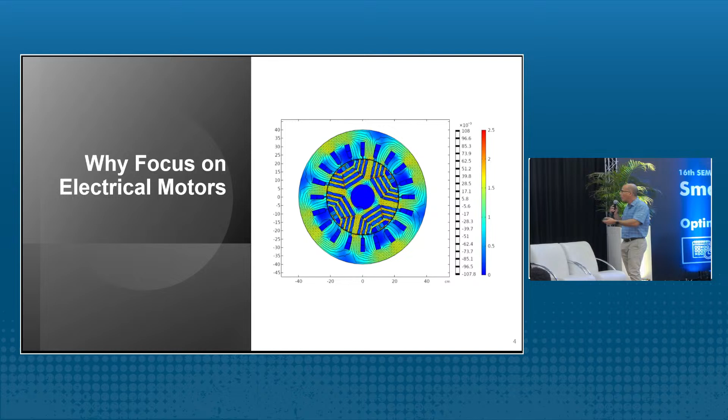Well, but let's establish a baseline. I don't know if most of you are electrical engineers or not, but this is a bit of my timeline. I started working with electrical motors, and really early in my career, I was approached to optimize their energy consumption, to make them consume less. And most of this was focused on replacing or improving the motors, but why?

These are some numbers. 53% of the energy consumption in the world right now is consumed by electrical motors, but this is old. This is actually growing. The applications I see coming up are more electrification, more motors that weren't there, and more FCs being used in places they weren't used before. Container ships, cruise ships, trains. More and more of these are being placed where they weren't before.

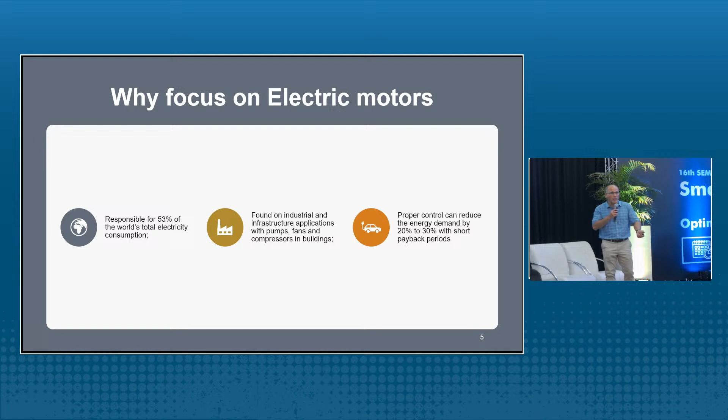I can talk about fans, compressors for buildings, name it. And if you do that properly, you can easily reduce the consumption 20, 30%. So this is really attractive. And that makes especially the sales say, oh, let's go for it. The investor, let's go for it. And you, hey, let's hold the horses a little bit. But let's go step by step.

Why this focus on electrical motors? If you go to the industry nowadays, and this is going to be a bit boring for some, but soon I'm going to bring you the problems, the fun part. Well, the induction motor, most of the industry still uses that one. In 2010, 2011, 2012, many customers were just using induction motors with nothing fancy. And for a simple reason.

An induction motor is a pretty simple machine. It's an amazing machine, a genius machine, where you have the stator. Once you energize the stator it generates a magnetic field, and the variation of the magnetic field on the rotor, the relative speed between them, ends up inducing currents on the rotor, which produce the torque, which spins up the motor. So by its nature, it starts to move, which is really great.

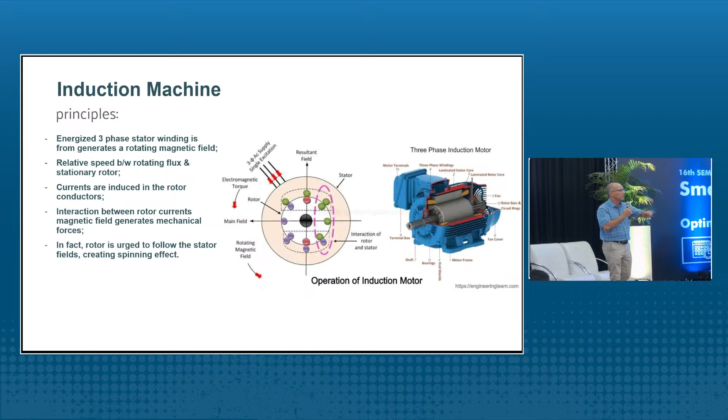And simple. That's why in many applications, fans, simple pumps, just connect to the grid, that's it. They have some problems, yes, but that was good enough for a long time. But then I started to be approached by customers saying, hey, now I'd like to have an FC there, or a drive, a frequency converter. I end up calling it FC all the time, sorry about that.

Why an FC? Because with an FC, we can first of all reduce the high current during power up. We can reduce repair costs. We can get power savings, because we can use methods to impose only the needed magnetic flux on the machine, reducing the amount of energy, especially in partial load. That is really great for that.

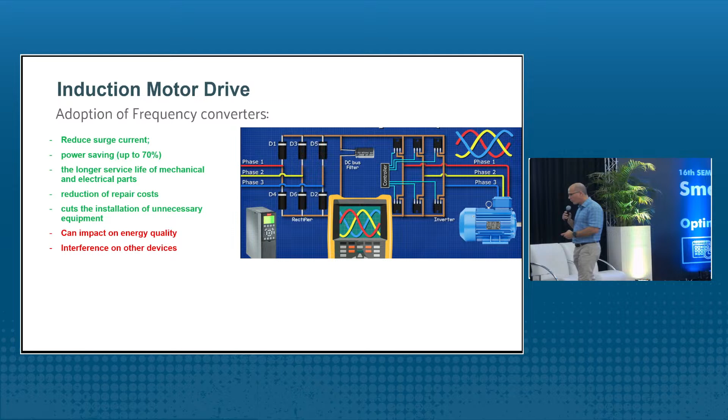And for a while, that was sufficient, till I started to receive a lot of these motors here. It started to come PM motors. And PM, basically the principle is quite the same, but there comes a big difference here, where in the induction motor you have just a circuit and a shaft that allow current to be induced and circulate to generate the movement.

The PM, you have the magnets. And just by thinking like this, you have the magnets there. You had already spent energy building these magnets, to impose this field, to align the monopoles to generate this magnetic field there. So while this rotor, these magnets, interact with the magnetic field, they start to spin. And by nature, we already consume less energy because the energy is already there inside.

And so for a while, I started working with some of the motors, especially low power. This is an example of, oh, sorry, too close. A small one, 7.5 kilowatts. And here you can really see the big benefit of a PM compared to an induction motor, and why people were so excited at that time. Let's use that one, including myself. Let's use it. Let's go for it.

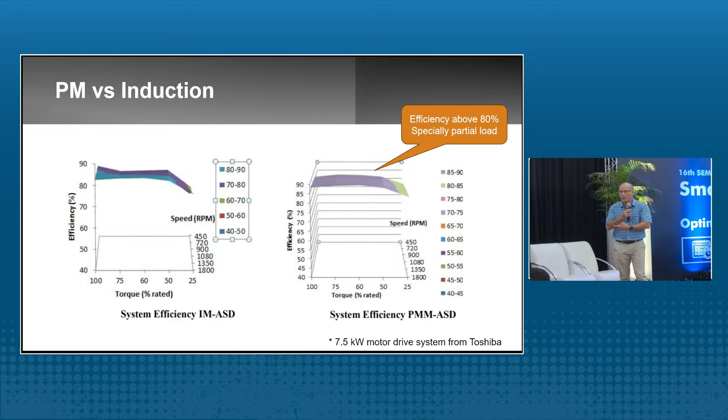So just by that, you see, oh, sounds not much, but then you have a line with 100,000 fans in parallel, then you see the big benefit. Oh, just let's replace it, right? I mean, pretty simple. But in the beginning, I started to question, okay, but can we use it, and now I ask these questions all the time, and I can point it out right away.

To choose a kind of motor, you really need to understand your application. But not only the application, if it's a fan or a compressor, but pay attention to the environment. What's the range of temperature I'm going to face? Are we going to have negative temperatures or not? Some of the applications are going to face minus 30 degrees, minus 20 degrees. Others go up to 60 degrees. This is important.

Lifetime of use. I'm talking about what's the torque profile? How long are we going to use nominal load, partial load? This is important. This needs to be part of the equation. And often, these are not at the beginning of these discussions when we start a product design, unfortunately. Now I bring it up, but it took a lot of headache. But it's just the beginning, and you're going to understand why I'm talking about that.

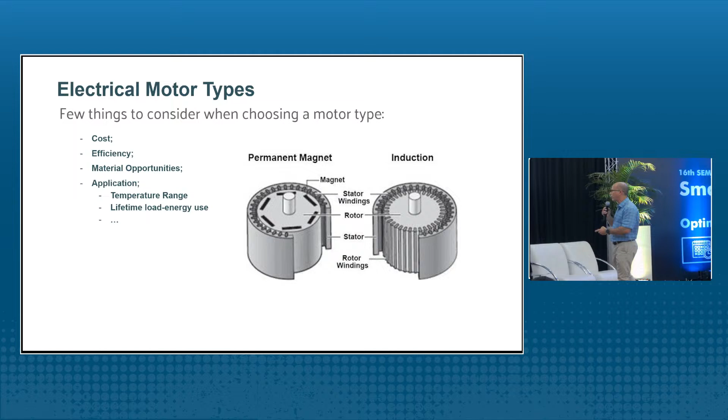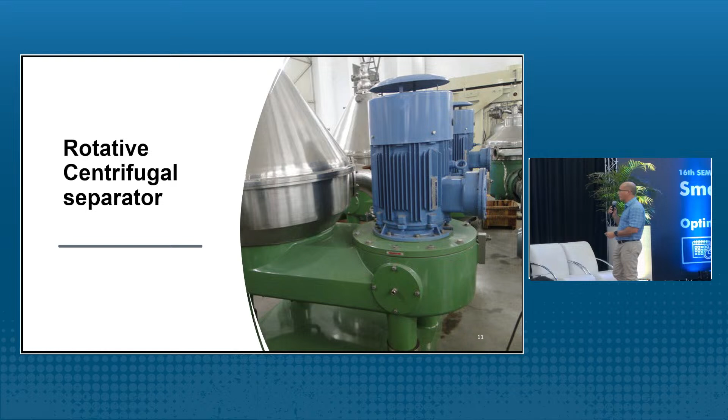This example was actually really fun to work with. This is a rotative centrifugal separator. I don't know if you heard about it, but the people that go to the gym know what I'm talking about when whey protein comes up. You have the separator, it basically spins up, and they do this process called the clarification process.

And for example, a fast story, really fun, interesting. The first week that I was in Denmark, in the supermarket, I went to buy milk. And then in the shelves, they had like 5 types of milk, and I couldn't understand why. They have soy milk, milk, several names that I had no idea what they were talking about. And then I approached the shelf, and one lady approached me, "You're not from here, right?" Oh, no, not at all.

Yes, this is 3.5% fat content. This is the different content levels of fat, 0.2%. It's done by these machines also. Smaller machines, but yes. They are used in many applications and different power sizes. Some to extract bacteria, some to extract oil from water, so it's a really large application area.

And when I got approached for this one, I was working on control for PM machines, and it was simply to work on overvoltage protection for this application. That's it, for a PM. And I was sold on PM. Let's keep it clear.

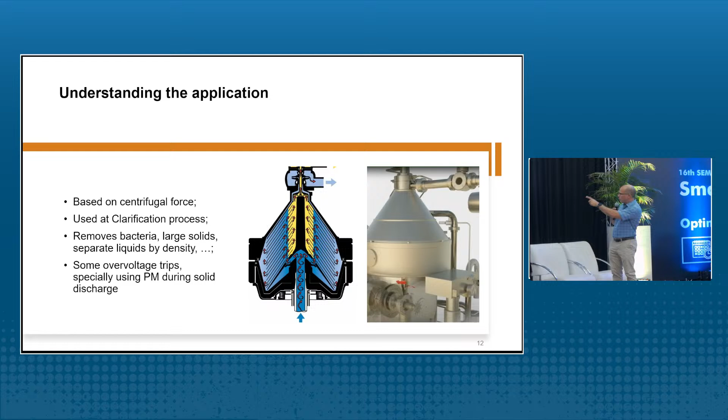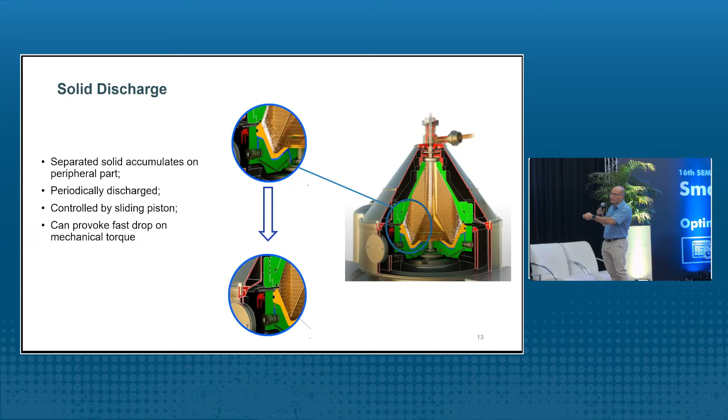And it was written in the documentation that I received that they were tripping due to overvoltage, during the solid discharge. What are you talking about? Investigating, solid discharge is basically during the centrifugal process: whatever material, liquid, powder, goes through this path. This is spinning, and then the heavier part accumulates here. Google it, there are several animations. There is actually one really cool one explaining pretty well how that works.

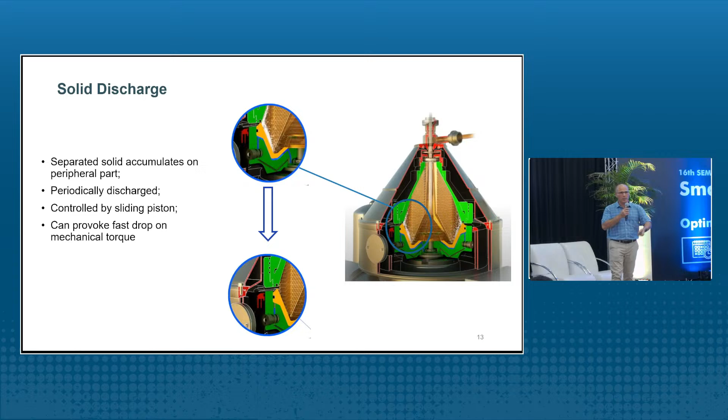But the problem when I was approached, the way it was described: when this valve was opening, I had over torque, and what I saw happening was a fast drop in mechanical torque, and then suddenly the machine was generating and tripping. Then I started really working on this project, which in the beginning would be a line from 55 kilowatts to 250 kilowatts. Then, of course, with overvoltage protection already mentioned, and ensure energy benefits. That's it. That was really clear.

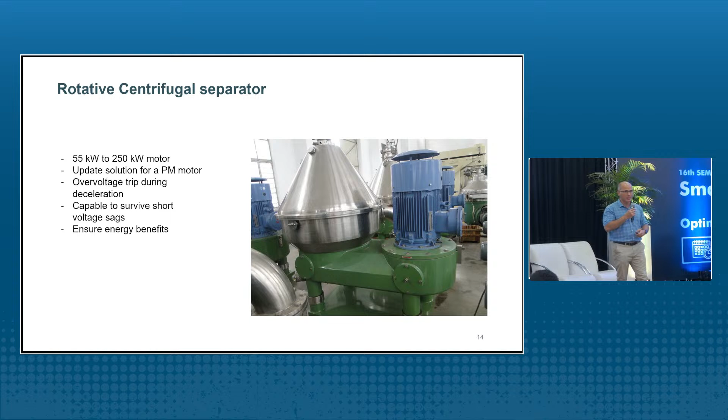Then, a couple of months later, I received the data of the motor, with a comparison with an induction motor, and it was amazing. This machine, which later on I learned was actually a PM-assisted synchronous reluctance motor, which is a big difference. I don't want to go into technicalities, but it's not a PM, it's a different one. If you go deeper, plenty of professors here can explain, but some of the techniques you apply to control a PM machine are a little bit different, especially initial position detection, right? We talk about it, and we suffer a lot with that.

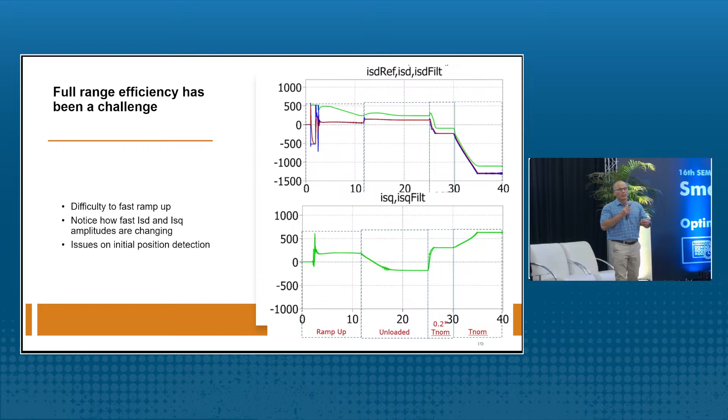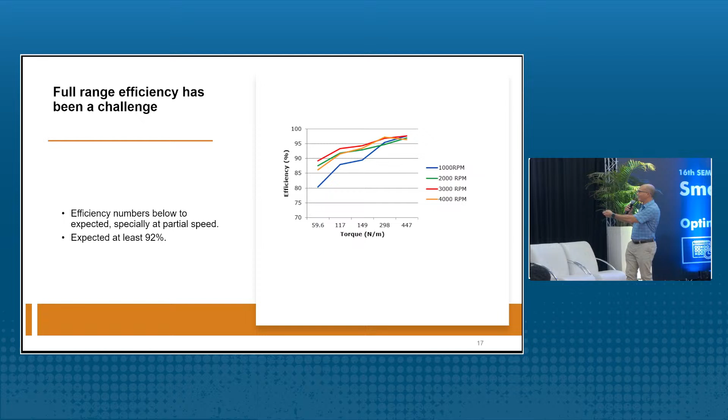When they build contracts like this to build a product, the idea is to have a full package, the separator, everything at that power size needs to be more than 90% efficient, the whole system. And my motor was already lower. So unless they would save more on the mechanical side, which would never happen, I needed to do something about it. Especially because they came and said, look, I measured, the motor is amazing, so you're doing something wrong. But I was using the parameters they gave me, and trust me, it was a lot of months, meetings, headaches, and frustrations.

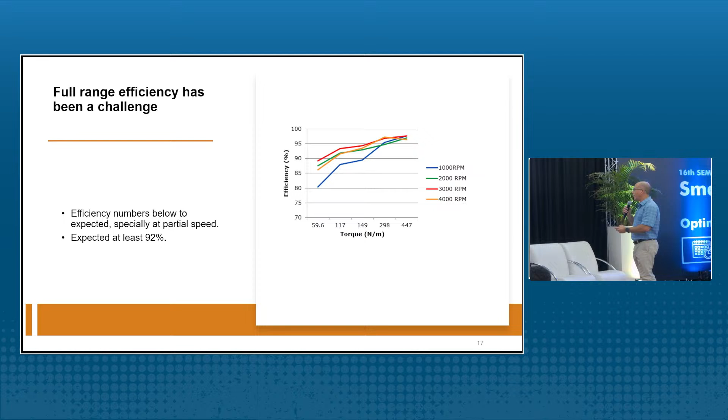Then, finally, I managed to find the problem. It was basically, hey, the parameters you gave me are wrong. Or, I didn't say wrong, but they have a small tolerance here; I needed to sound a little bit different. Sorry, guys. I didn't say the company, at least.

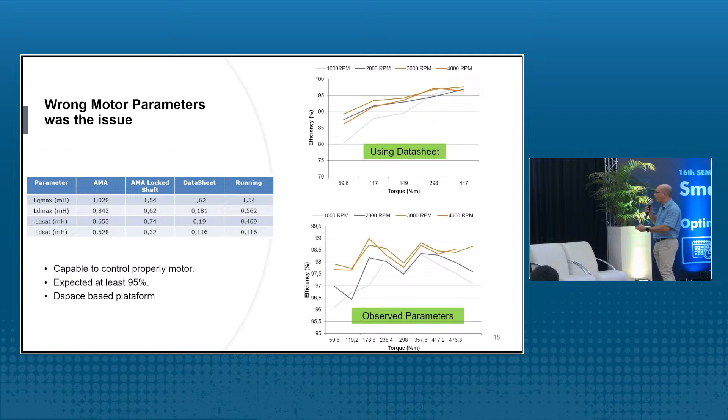Anyway, at that time we finally had a function able at least to determine these parameters. This is AMA, automatic motor adaptation, basically identification of motor parameters. It sends a sequence of signals into the motor in order to identify the rotor resistance, stator resistance, inductances, and so on. Once I finally got these parameters, that was the efficiency level I got. Even at partial load, I was above 95. That was great.

And then I think was the biggest mistake ever. Because at this point, I'm a specialist, out. Give somebody else the code. The rest is just implementation. Things are done, right? It's just implementation. And then you give it to somebody else.

And then I was already in another project. "I'm a specialist, Ben. You won't be spending your time coding, right?" Yeah. Then frustration: tests were terrible. They barely could ramp up when the torque was close to 75%. This was happening.

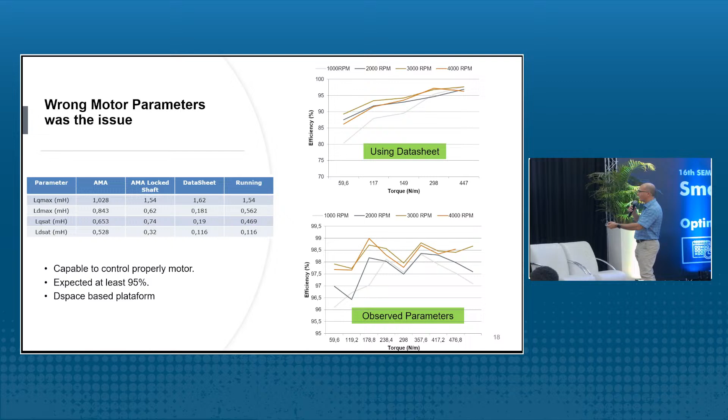Discussions, meetings, what's happening. I'm going through the code. Saturation that shouldn't be there. Reset shouldn't be there. Order, sequence. Basically, and that was naive on my part, I had the observer because the test setup that I was using before was a dSPACE-based one, right? Then the implementation, C code, using a CPU slower than my phone right now.

So you have no idea how frustrated I was because I used an observer to deal with the angle, position of the motor. This is really important. The professor is going to teach you about PM, the ones interested, but it wasn't suitable for the CPU on the product in the end. So I made shortcuts. In the end we managed, but after almost 1 month. And then you have a stakeholder that was already waiting 2 years for the result, right? Anyway,

finally, we managed. But from there, the product line would be from 50 kilowatts, 50 something, to 250. So the sales team was, yes. In the end, not really, because it took too long; for the lower power, you know what, let's use another type of motor. To make it worse, magnets at that time, neodymium wasn't that expensive, so they ended up going to neodymium because it was working anyway. Basically we almost shut down the product when it was at the end of the line.

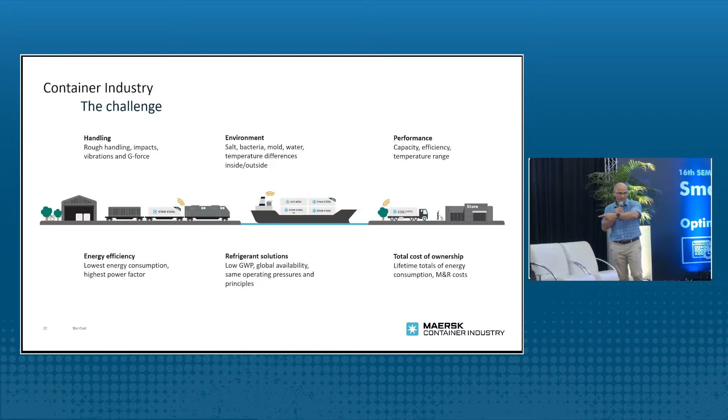And of course, they would like to save as much energy as possible. If any of you have seen a container ship close up, I'm talking about thousands of containers in parallel. So you save 100 watts in one of those, and energy comes from a diesel generator, right? So you got the equation. It's a lot of cash saved here.

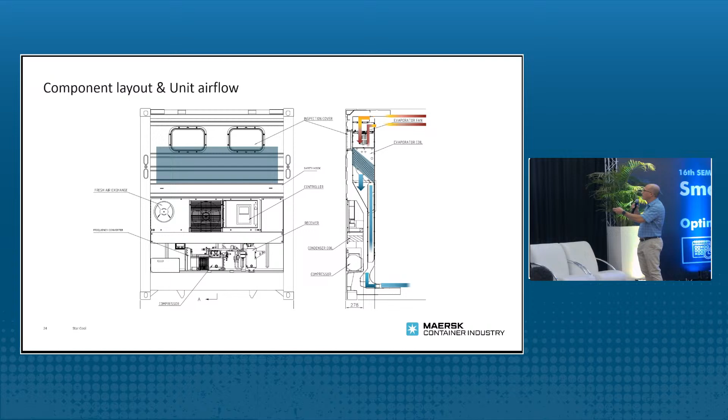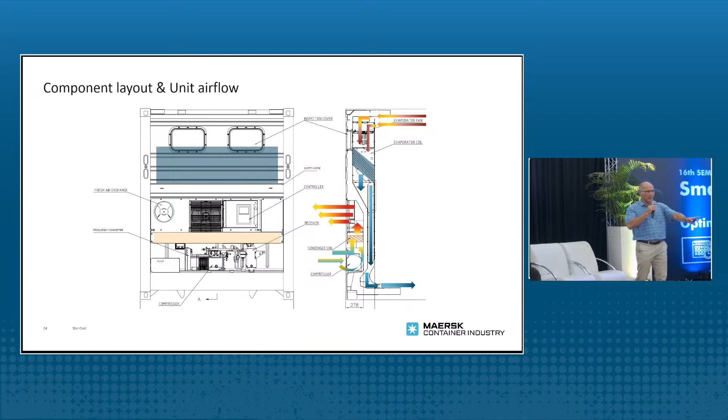But basically, the principle is quite simple, actually. You have one of the fans sucking the hot air. This air goes across the evaporators, which cool it down and drag it back. And then you have the condenser bringing out the hot air, and the hot air is sucked out from the unit through another fan, and the compressor drives the process to extract the heat so it can go out. There is plenty of material about that. I won't go into details, especially because I'm taking too much time here, sorry. I'll speed up, promise.

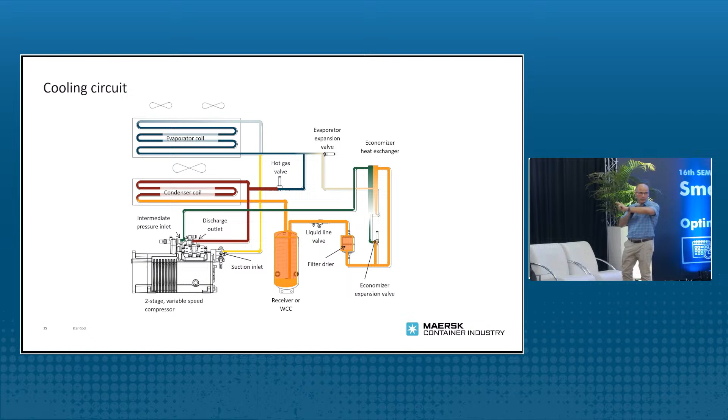This is just a circuit, but here the placement of the fans and the container is more visible. That is a good animation to explain, and there are good professors here to explain it. But what was my job? Here is the spec of the compressor. Basically it needs to run from 600 up to 3,300 RPM. And why 600? Because, if you see, oh, I need to go back here.

Here's the compressor. Basically part of the stator is the shield of the compressor. So you have a manufacturer building the motor, this part here, and then it's placed inside the cage of the compressor. And this compressor, and this is important, has 4 pistons, which regulate where the hydraulic fluids and gas go. And here also is the FC.

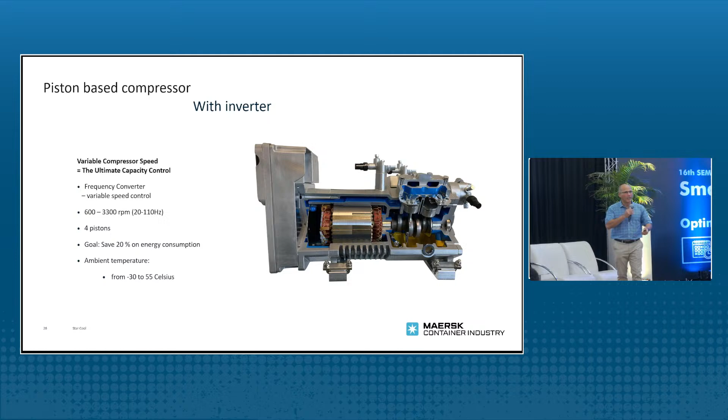And it can get worse. May I ask you, what should I do if one of these valves breaks and I'm in the middle of the sea?

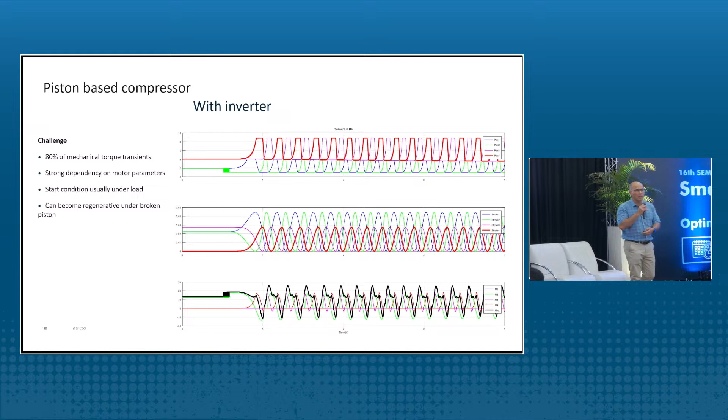Like this. Suddenly one piston breaks and then the torque becomes like this. What should I do? Should we set an alarm and stop the compressor? And stop the reefer? With, you know, full of tuna, which is pretty cheap, right? Or the last cargo that I heard about was 600 millions and it was just a container. Should we stop, right? No.

Keep going. Needs to run. Gonna consume more energy? Yes, but needs to run with this torque. And then I'm asked to put a PM. Yes.

But why all the excitement? Those were the numbers given to me by the motor manufacturer, where you have clearly the difference between an asynchronous motor and a PM motor. Again, as we talked about, how good these guys are, especially in partial load. So this brings a lot of benefits for the customer.

And it's important to point out that I have many, many cases where their operation was close to nominal, and the power size, and considering it was just, you know, 2-3% of saving for the power, I basically recommend, man, don't even put an FC, put just a contactor, that's it. You know, why? There are high efficiency motors nowadays. But in this case it was clear. Yeah, clear benefit.

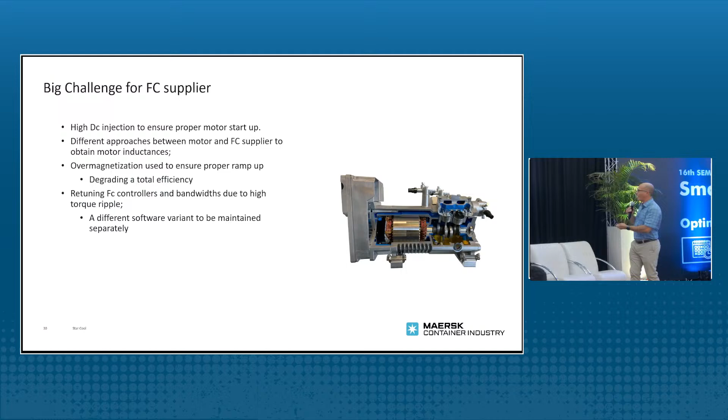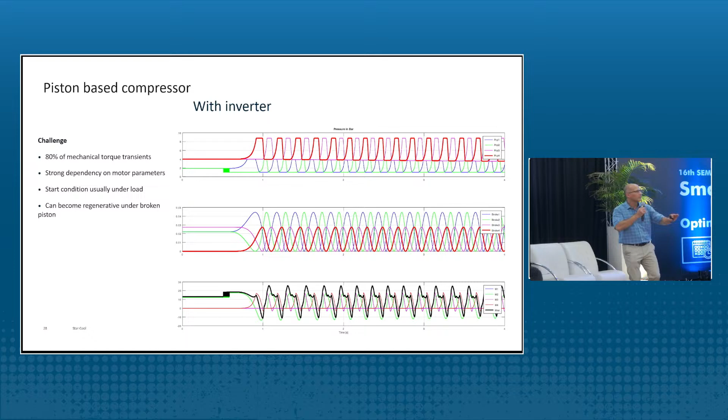But again, as I was saying before, a PM is a great machine, an excellent machine, but with some torque profiles like this, when you do the power consumption measurements on the motors, yeah, they are quite efficient, but by their nature they have some limitations compared to an induction motor. An induction motor, with something like this, if you don't control it properly, keeps running. During the transient they consume more, but then they settle down. These PMs, no, basically they lose it and bye-bye, you lost the machine.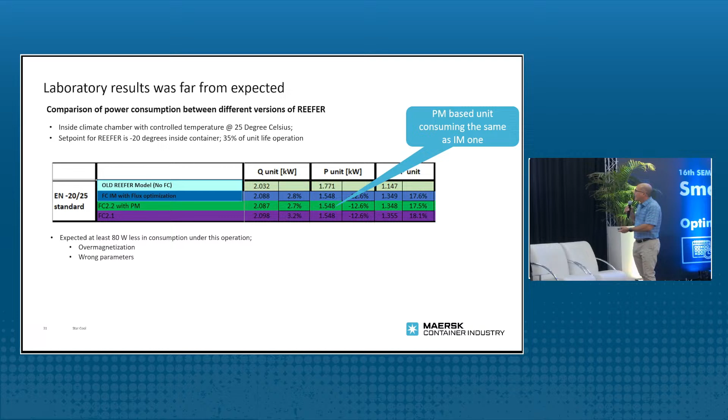That's it, you know. So in this case, what was done, and I know because later I left the team and did something else in my life, these guys said, man, I need to over-magnetize the machine. I needed to hold it, otherwise I would lose the sync. But over-magnetizing, I'm consuming more. That's a challenge. So the conclusion was, use an induction motor, man. It was more efficient. You just needed to tune a little bit more. That's it, you know?

Didn't we know that in the beginning? Actually, I had a feeling when I saw that torque. But, you know, again, the excitement. Ooh, take it easy, guys. That's why it's so important for you guys to listen, because most of you will be my boss. So please listen. When I say, man, please, what is the torque profile? Where is the temperature range? Which CPU are you going to be using? This is important. It is not trivial.

Unfortunately, my lost hair, my experience shows that. I face it with pain. Okay, and then during that time, I

joined the group, and it would be easy sailing in theory, because it would be, oh man, I have three more fans there. Let's put an FC there. Let's put a PM there, and it's just a fan. Oh, well, yes. And then we saw the measurements, the efficiency. That's gonna be easy, right? Easy, great. And then, of course, an uncomplicated profile. So retrofit is gonna be simpler. I mean, easy sailing. That was a misconception.

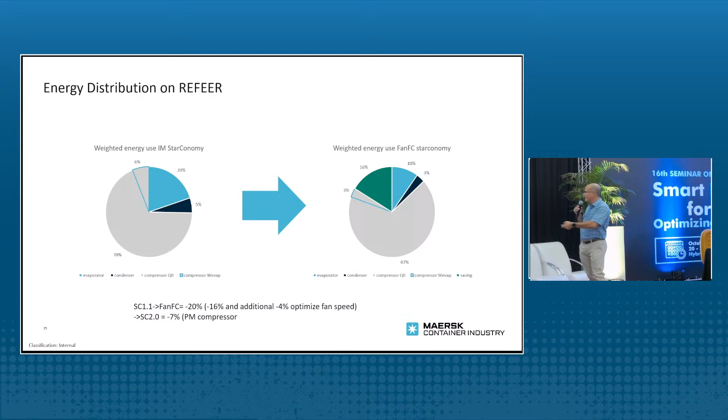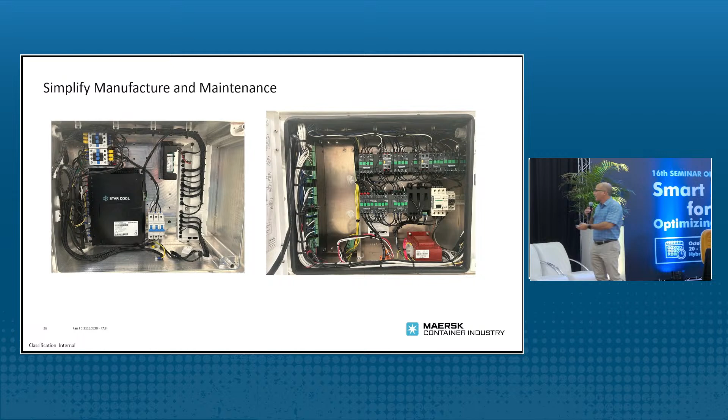And the other big contribution: that's the standard unit, right? Here are all the contactors controlling all the fans, turning on all the compressors, and that's the new one. Wow, right? Especially the technicians. Talk with the technicians, they would love this. Great. Easy sailing. Oh, why is it not working? Then we started to have a little bit of problems here and there.

By the way, this test was so amazing. Unfortunately, I couldn't bring pictures of that. But I put the container in a big container climate chamber, basically a third of this room. You put a container inside, and then you cool down to different temperatures, like -20. You can go up to 60 degrees positive, and do a bunch of tests there to really evaluate how these guys operate in different temperatures, and also to evaluate how much energy we are spending to cool or heat up something inside the box, the container.

And then the not good news was, this is the operation mode. The box is inside the container, and ambient temperature is outside. And then 40 degrees, 38. Of course, thank you, Excel, it made a division here. Sorry about that. But it would be minus 20 divided by 25 here, or 38, sorry. Anyway. And here are other similar set points.

And lifetime energy use. This is the percentage of the conditions the container faces along its life. 35% is cooling something inside at -20 with an ambient temperature of 25 degrees. This relies on data we have on how our customers, all general customers, use it.

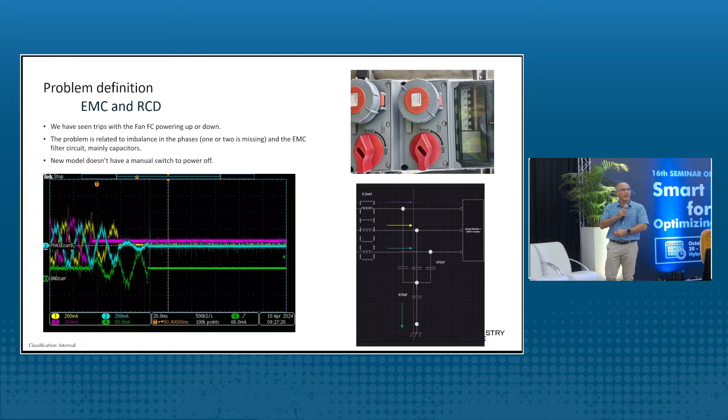Nice. Let's have a talk with the team. Danfoss, look what I discovered. And then we talk, but we never saw that in the field. What's happening? Called another company. All these discussions. Let's redesign the EMC. Great. We attended the requirements. Yes, maybe. Because that was a challenge. We started to fight. Okay.

Basically, what I found out by the end was, to save money, they had chokes, induction chokes, right here. And there are professors here, I don't want to go into details, but for EMC conductivity you have 2 ways to filter, inductive and capacitive. Paulo, you know that much better than me, right? You can do it both ways. But which is cheaper, inductance or capacitance? Capacitance is much cheaper. So in the second update they did, to attend the requirements, they reduced here and increased here. I had more capacitance there.

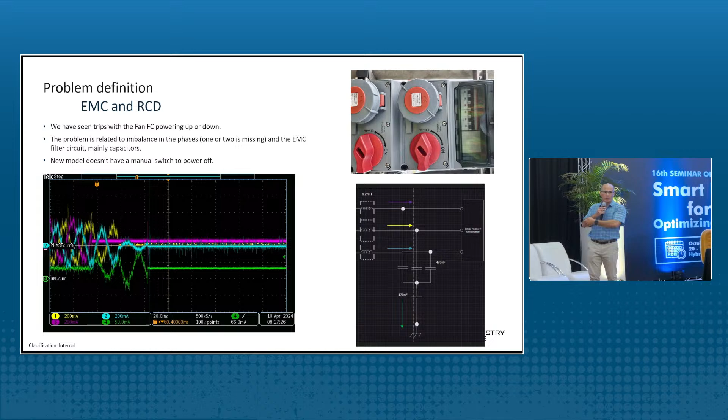To make it worse, I put an extra FC in parallel with that one. What happened? I just had more capacitance. Well, I was having tripping all the time when I put in the FC. So we joined the teams. I had a meeting with 3 companies. We spent like 6 months to arrange everybody: please, let's sit together. We need to sort that out. Because I know you design your EMC to attend some requirements, you as well, but we're having this problem.

Great. And also attending the EMC requirements, because here was actually at Danfoss. This is one of the chambers they have to measure radiated emissions. It's an amazing place. And I needed to prove, guys, yes, but let's minimize the capacitance, and it wasn't sufficient. So it was a team, 2 companies talking together to find an agreement on how much less capacitance I can have, not having trips, but still fulfilling the requirements.

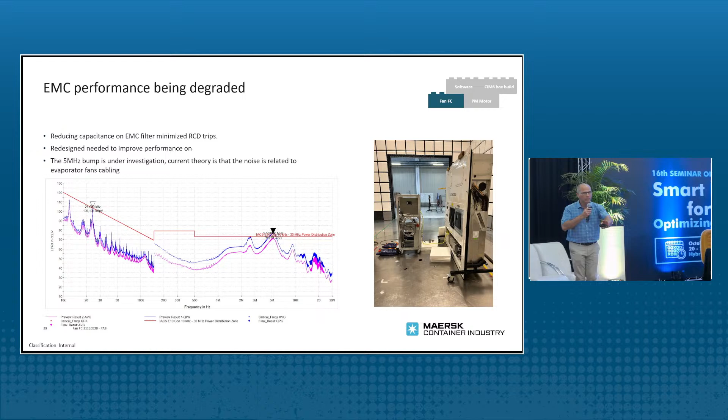That was the level with both products. And that is still, I must say, a challenge today. How much should I ask from one or another? But we're happy right now. At least we were. Because this happened. Easy sailing, right? Now we are in a different phase, prototypes fine, but let's go to the container ship. Put it in a container ship. Suddenly we started to see FCs blowing up. The DC-link was just exploding.

And okay, what's the condition? Let's see the data log. Well, the FC was at standstill. Nothing was happening. And then you blame quality, you blame the suppliers, meetings. But you know, that's what I like. Never forget theory. Never. Tools change from time to time, coding languages change, but the theory, the principles, the physics never change.

I remember long ago when I was studying, they were talking about residual currents, especially with big motors. And then I was looking at the schematic of one of the container ships. And actually it wasn't me, it was an amazing guy, Kim.

It's one of these engineers, it's amazing. He pointed out, Helder, I think it's this big baby here. And then we were talking about, oh, what's the size of this one? No, not this one. This is a 360 kilowatt motor drive, but there is no connection to the ground. There is none, because this is a container ship. They don't need to, there is no ground. I mean, where's the ground? There's no ground. But it's a big motor.

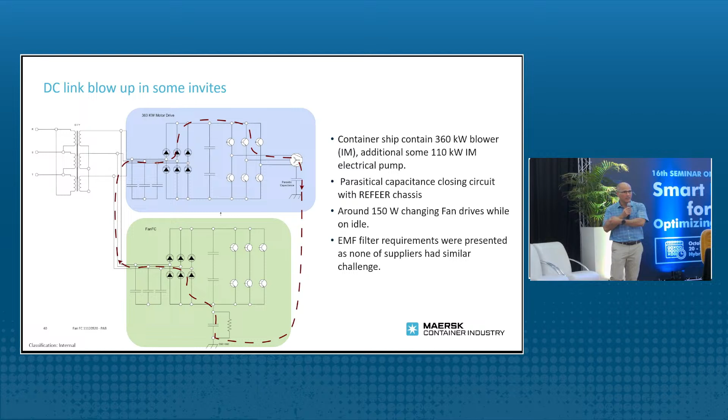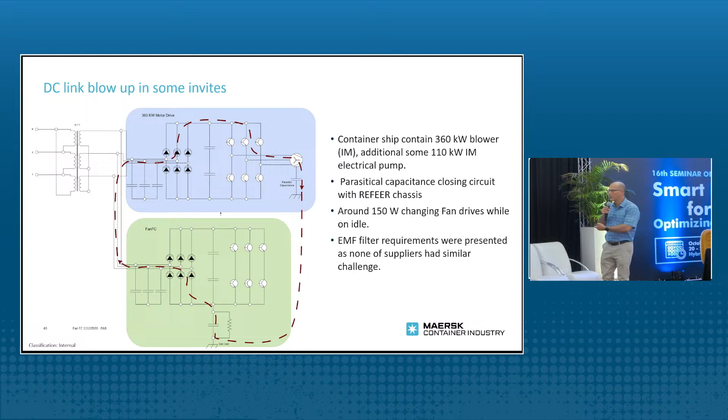We have this big organization, we have so many problems with communication. And that was just one example. I know somebody faced this problem. Danfoss, for example, sells things for the marine. They know this problem, but we didn't. And even the division that I was working in didn't know that also. But it was a relief. But anyway, soon everything was sorted out.

At least we started to also play, we got a chance to play a little bit with the system, trying to understand the system, because for some it was a big difference, because the plan was, let's use the same software, don't change much. Let's use the same software, put the FC to control the fans, use the same reefer control unit. I'm talking about, you know, set the temperature you wish to be inside the container, and then the controller deals with how much the compressor is going to be running, the speed, how much pressure. That's the controller I'm talking about. But they have a software, they have a sort of algorithm and procedures that the algorithm follows.

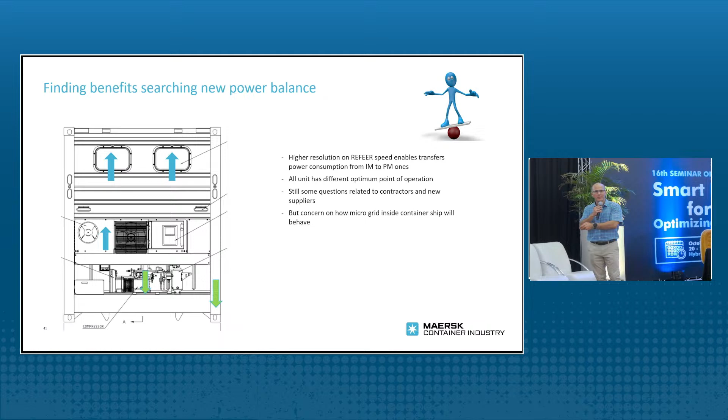We might be changing that also, because we already could see that, which makes sense actually. As we have PMs here, and here it's induction motor based, now we would like to increase a little bit the consumption on this guy here in order to reduce the operational time of this one here. If this operates more, this operates less, and the whole unit is going to save more energy. And actually, we could prove a little bit on those. Basically, by manipulating part of the speed, this is the operational cycle of the compressor, for example, and the max speed,

by just changing the speed, increasing the speed for specific levels, set points, the operational time was reduced from 3.5 minutes to 3 minutes, reducing the compressor around 100 watts. 100 watts, this is nothing. But 10,000, 20,000 containers, 100 watts. This is a big, big deal. But yeah, at least that was something, it was a relief.

But from here, honestly, I still don't know. It's clear, EMC conductivity counteracts with RCDs, with the design to protect RCDs. They work against each other. So there is a trade-off there you need to play with. And I'm not an expert. This is not my area, but unfortunately I was forced to influence and be part of the discussion. Remember, even though your task is this, once you're an engineer, once you represent a company, you need to wear different hats. If it's necessary, you need to go through.